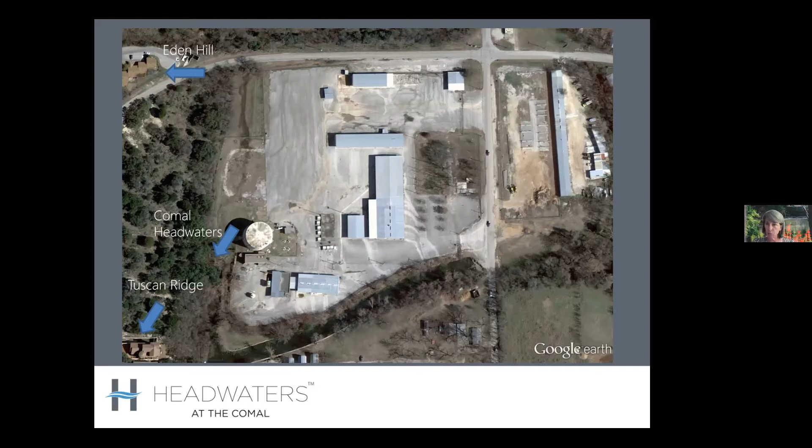They outgrew the site and moved up to the 306 site where they currently operate those same facilities and warehouse and electric and water operations. So the site sat vacant for a number of years. They moved out of the site in 2004, and a plan was created to repurpose this site in 2012 through 2014. And this is the vision for that site. So really completely changing this site and making it this environmental showcase. And we're going to talk a lot about that as we move through here.

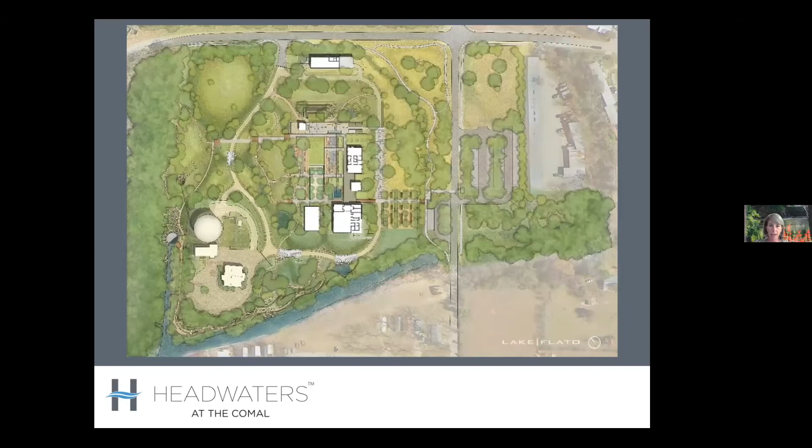So the Headwaters at the Comal nonprofit, as I said, started in 2017, and we got to work. We are working on programs and operations of this site as it evolves. We're a fundraising partner for New Braunfels Utilities to see that master plan come to fruition, as well as we've developed kind of 4 pillars of work that we really focus in on at the Headwaters. The first one is educate and demonstrate.

So this site is just rich for all kinds of educational experiences. Currently, we are offering watershed education programs, science, engineering, art, and math programs for younger kids. We've developed some restoration tours, native landscaping 101. We have field trips for 4th to 6th graders, and we're always continuing to develop more programs on this site. You can find out more about those on our website, and we invite you to come and join in one of those programs.

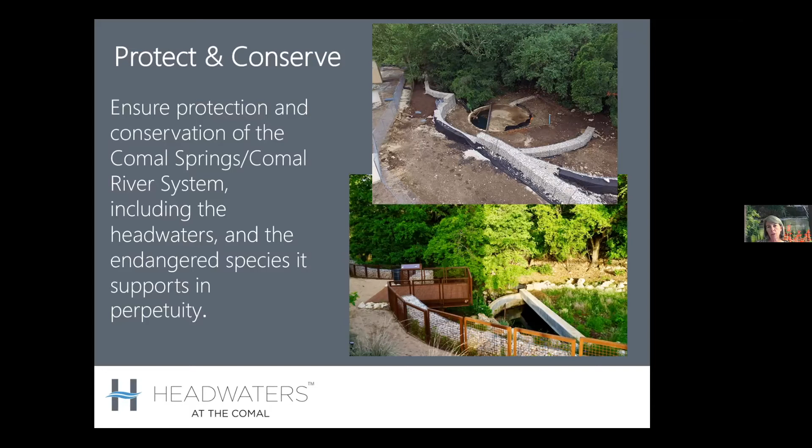You can see from these photos here, this is actually a shot of the Headwaters Springs up in the top left, just after the phase of restoration began. And then the picture on the bottom is what it looks like currently. So we really cleaned up the area around the springs. These rock walls, this curved wall and the ones along the bank here, are called gabion walls. They're helping to divert water away from that headwater spring and also slow it down and filter it before it reaches it.

And one more piece of the protection and conservation has been to partner with New Braunfels Utilities on the One Water work that they're doing. I just wanted to briefly mention this. I know there have been some talks. The Comal County Conservation Alliance had a great talk by Jennifer Walker recently on One Water. One Water is not a new term. It's a worldwide effort. Texas has recently really become a thought leader in One Water, and New Braunfels is looking to be its own leader in this effort, a regional leader.

And all One Water really means is to plan for and manage water resources more holistically and sustainably. Currently, water is really siloed in Texas. Somebody owns it, somebody manages it, somebody regulates it. An entity does wastewater, somebody else might do stormwater capture, somebody else delivers water to your home. So there's all these different aspects to it. How can we work together instead to manage that more holistically? It's also looking at protecting water resources in a way that maximizes environmental, social, and economic benefits. Of course, water is a celebrated feature here in New Braunfels.

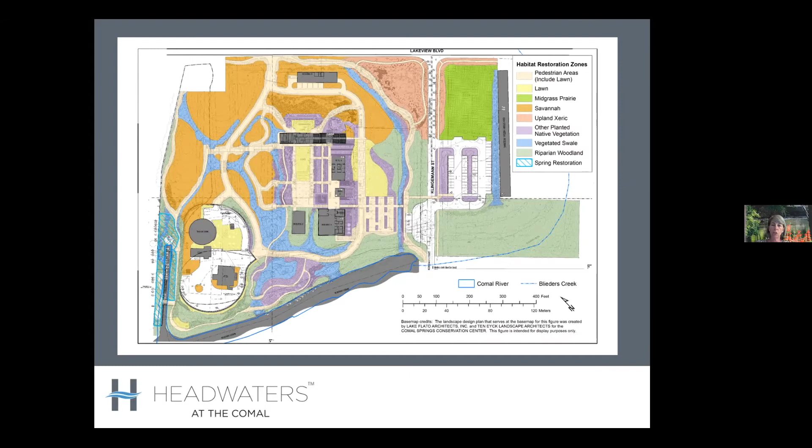And then within that, we'll have some demonstration gardens trying to show, well, you may not be able to plant a whole prairie ecosystem in your backyard. How can you incorporate little pieces of that to help protect and conserve our native creatures, birds, bees, butterflies, other pollinators, and incorporate small pieces of that in your yard. And so we'll focus a lot on that work.

And then, of course, the main goal of the first phase of the project was to reduce the pollutant load on the Comal Springs. So if you remember a few slides back, I showed the asphalt covered parking lot that we're at the very bottom of the Balcones escarpment in this watershed area. And so in a normal rainfall year, they could estimate that the water that would rush across that property completely unchecked and carrying with it animal waste, oils, debris from both the utility yard and upstream would have been around 11,850 pounds. That's equal to the weight of 2 Ford F-250s, right?

So that amount of pollutants would wash into the very beginning of the Comal River on a normal rainfall year. That's not during one of our big rain event years, which are becoming more frequent, but still a huge pollutant load on the river, at its very headwaters. And so the main goal of the project was to reduce that load. And post restoration, the improvements should get that down to less than 1,000 pounds. So it's like a 90% improvement to the pollutants that wind up in the Comal River.

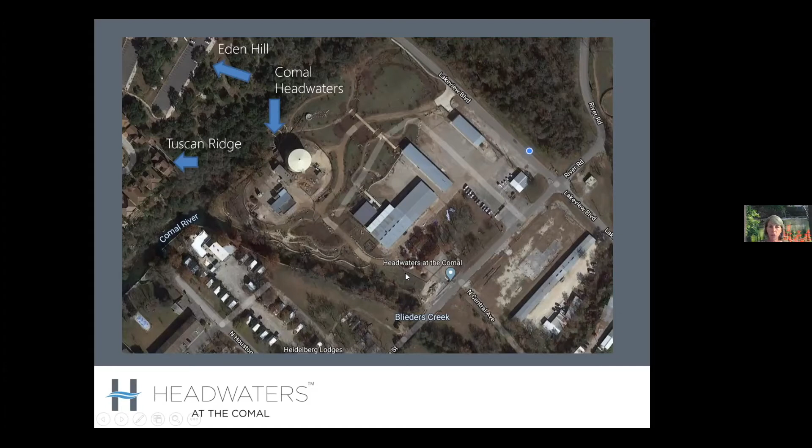And we're going to do that through a number of different measures that then we can monitor and share with the community. So this picture, if you look closely, the colors aren't very vibrant, but this top part here, you can see the greenery in here now. There's some trails and removal of asphalt in this whole area. That's kind of an overhead view and the beginning of our work here to remove those pollutants from that Comal headwaters spot. And so we started that with BMPs, or best management practices, and an actual treatment train.

So water now flows across this property, and here we're up at the top of, can you all see my clicker or my cursor when it's moving very much at all? I don't know. I'll just keep talking and hope that people can see it.

So this is up at Lakeview Boulevard again. And so this would have been all unimproved area. And now the water comes flowing across this property and lands here first in this little vernal pool, a little biodetention pond. It runs through swales, bioswales, and a little channel that then takes it to this larger one in the middle, another biodetention pond, an opportunity for that water to soak in and be treated through the native grasses and plants. And finally, there's another constructed wetland here at the end, which will do a final treatment on that water.

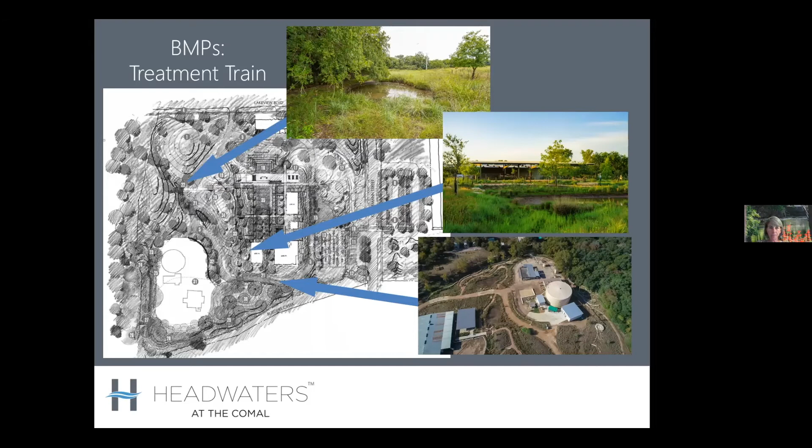Whoops, my slides keep popping up on me.

And the features that I mentioned before, the first little vernal pool is back here and the edge here, and then the water will flow through this swale that runs along here and will wind up at that other big pool. So, a beautiful way to stop, to channel stormwater.

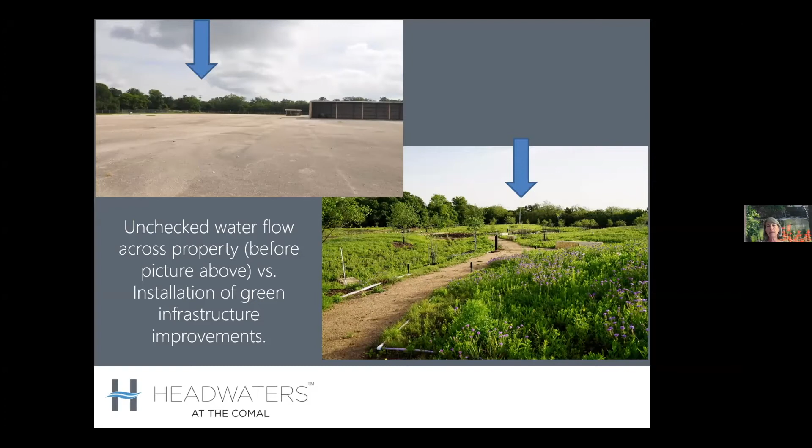First of all, we're not having to use a concrete sluice of some kind, but we're installing this beautiful green prairie, providing a number of different purposes that ultimately help to keep water on site, give it to wildlife, polish it and cleanse it before it ever gets back to our Comal Springs.

Another view from another angle, and this is kind of one more step in the process, showing again this bioswale up at the top when it had just been installed, and then the lower picture a few years later. These bioswales can actually remove like 200 pounds of TSS, which are total suspended solids or pollutants, and they reduce the runoff by 1/3 of an acre foot.

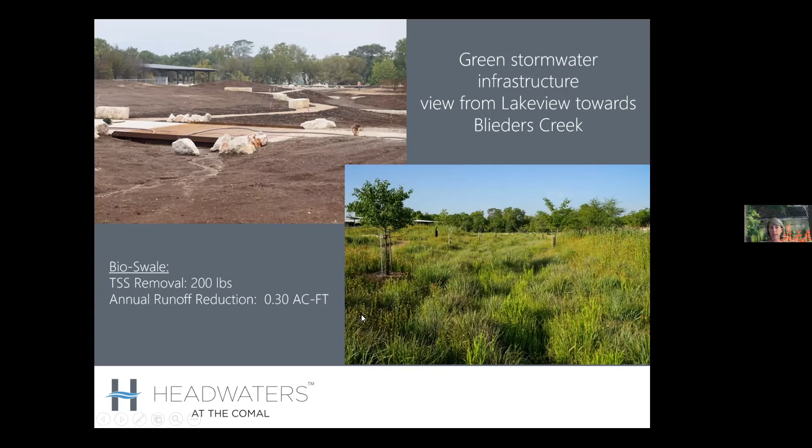Here's that spring cap again, just a horrible picture on the top of, obviously this one was a little bit impacted because of the construction on site, and we were just at the beginning of the project when we got this big rainstorm. But just this unimproved area, that is really what the Comal Springs, the water that's in that spring, in that cistern area, looked like before this project started. When you get a big rainfall, it was just gray and dirty and awful.

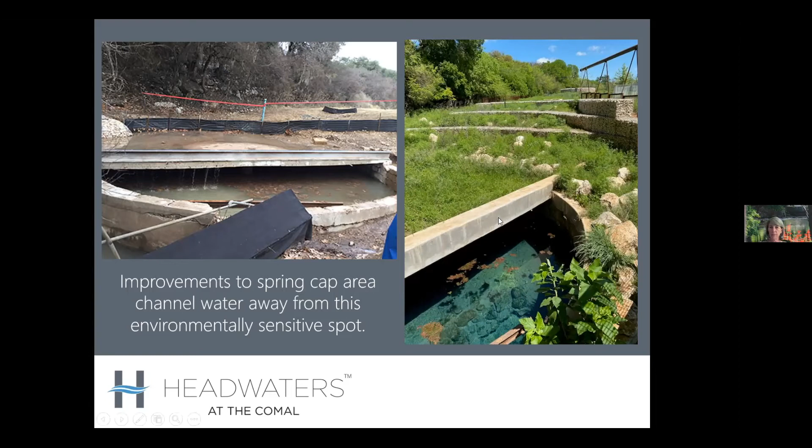And the bottom picture is what it more often looks like now. It's just crystal clear, beautiful, clean water. And you can see some of the upstream improvements there looking up towards Lakeview from that picture. Again, just some of the less improved area here.

The other feature that this is showing here is this diverter pipe up in the top. And that's a feature that's not going to be relevant to many other installations, but specifically at the Headwaters here, this is connected to a water treatment tank. And so this water that's on the site is treated potable drinking water that goes out to the community of New Braunfels.

And before the project started, if there were any problems with that treated water tank, it used to flush down this area here where that gravel is, and just right across this concrete into the spring run. And that water is treated with chlorine and fluoride, so a terrible impediment to the Comal Springs.

And now instead this water is distributed out through this diverter pipe into a catch basin, which again puts it into that swale system and series of vernal pools and bioretention ponds and constructed wetlands that help to channel and filter that water before it gets back to the springs.

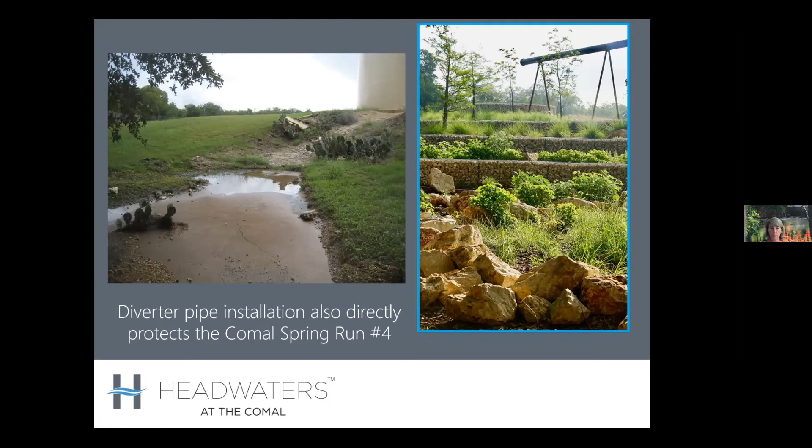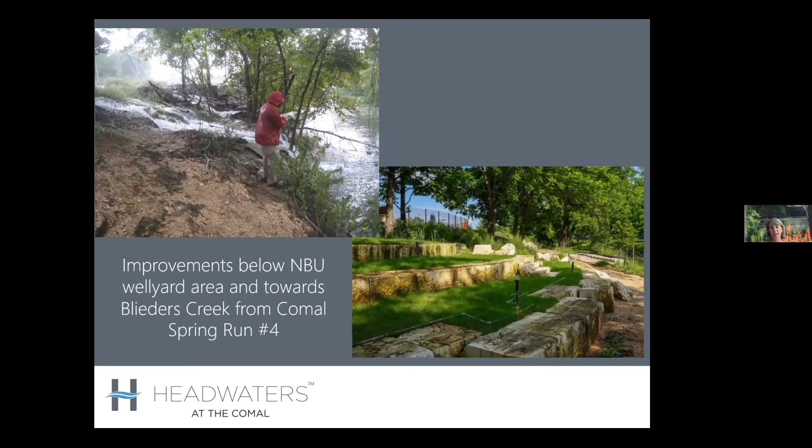Another picture just kind of demonstrating again the power of that water and the way it used to rush across unchecked. This area now looks like the picture at the bottom, and from another view. So that was basically phase one. Phase one was really that initial stage in green stormwater infrastructure, bioswales, bioretention ponds, and constructed wetlands that help to channel and filter that water away from the very beginning of the Comal Springs.

And as far as water conservation goes, we will also be starting another phase of a more technical aspect of using water on the site, and that's on-site water reuse. So we'll have a number of large rainwater harvesting catchment containers at the very front of this Center at the Headwaters. They will be capturing all the water from this roof off the main building. It's about a 19,000 gallon storage.

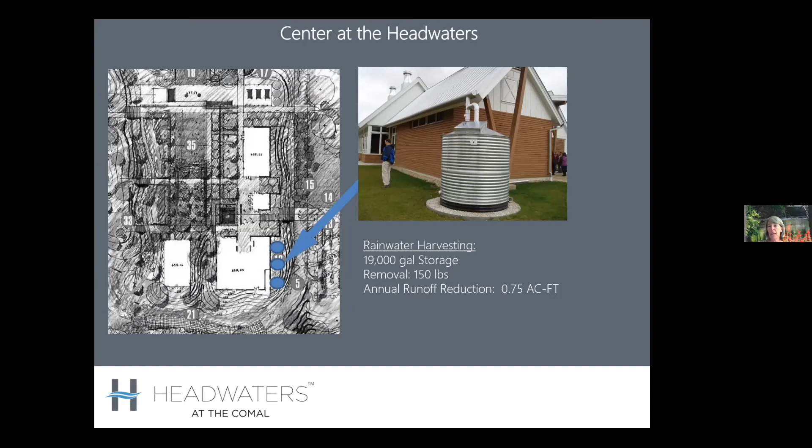It will, and we can testify to this from phase one, capture a lot of the water that was running off and potentially in previous years had been impacting the springs, but we'll also be able to start to use that as on-site reuse. So we'll use that for a number of different purposes.

A really exciting one that won't be completed till the final phase, but this is the first step of it, is this kind of on-site reuse system that is part of the main building, and also our building up here, which will be our environmental education center. So we have the rainwater capture on the front, and then the restroom facilities in the main part of the building are connected to a black water reuse system.

So our toilets will flush, channel into a sand filtration system, then be diverted to these subsurface wetland cells, mixing with rainwater collection. Some of it will be used for irrigation on site. Some of it will be pumped back to reflush those toilets.

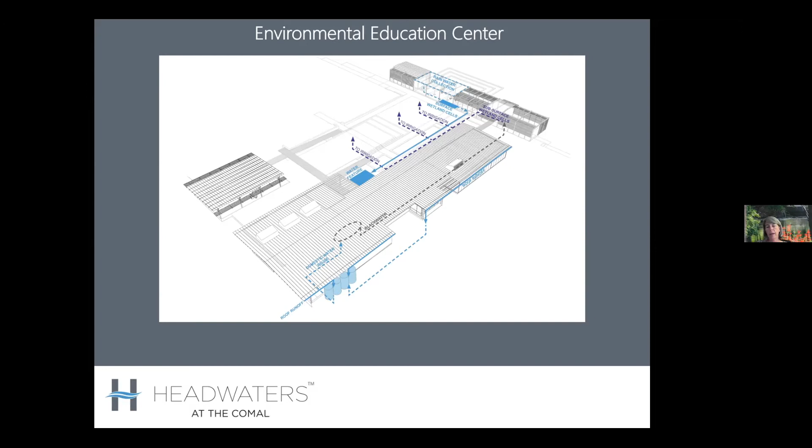So really trying to capture and preserve stormwater that's coming off the building in another way here by connecting it to this on-site reuse system, really reducing the water use from irrigation, which is one of the largest uses of potable water currently in the community. And so how can we start to demonstrate other ways of irrigating our lawns? Rainwater is a great option for that.

And so as rain hits our karst rock formations here in South Central Texas, that water just filters right through it, comes through these rain chains into these constructed wetland cells, and then is part of this larger story about how our water bubbles up through our springs here in Texas. Another fun fact about the Comal Springs: it provides some of the largest freshwater flows to the Gulf of Mexico, lower than the Canyon Lake Dam here.

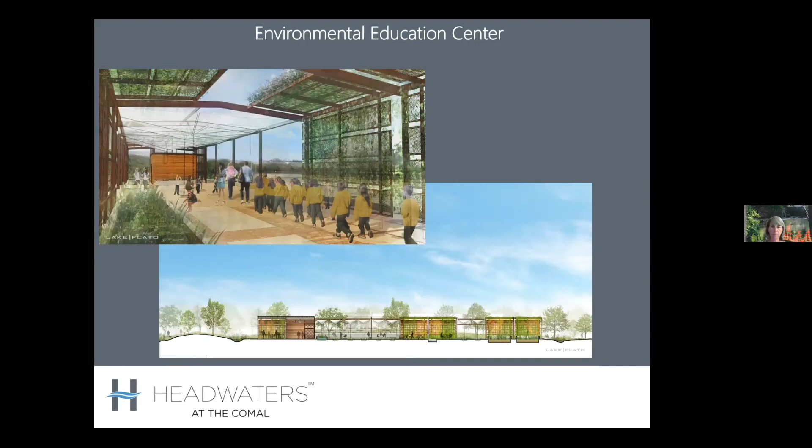So we will actually have some troughs and channels that run through the site and wind up in a pool that represents the Gulf of Mexico. So one, educating and demonstrating these new technologies, black water, on-site reuse with our rainwater harvest catchment, but also visualizing for people how this water system here in Texas is so important all the way to the Gulf of Mexico and for the health of our bays and estuaries.

So after we finish the center at the Headwaters, we'll be moving on to the parking area across the street. And that's another great opportunity for removing some real hard packed surface. There's not much asphalt over there, but it is hard packed impervious cover. It has not been maintained. It's used right now as a staging area for some of the construction that's going on in the community.

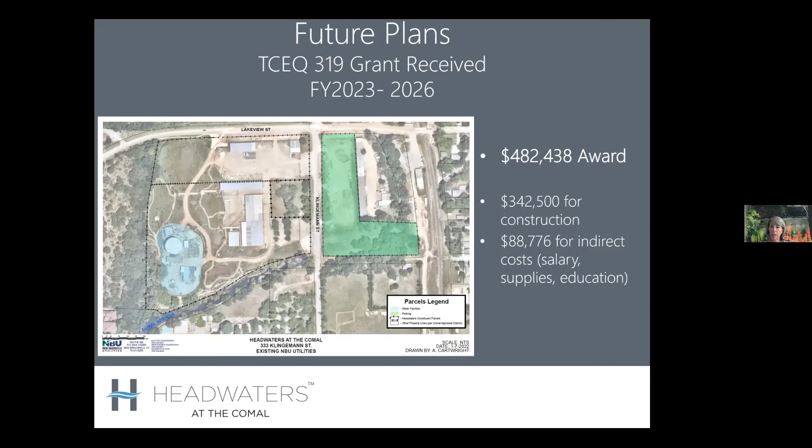We've received a grant from TCEQ, which will start next year, to help us repurpose that site as well. And it will become another great demonstration area for parking areas in the community. So showing here are some curbside rain gardens. So instead of just having stormwater from a parking area rush off, it instead flows into center channel planting areas that don't need additional irrigation, but instead capture and hold that water with the right plantings in there.

Those plants survive and thrive and provide a space for that runoff water instead of just sitting in a parking area, to be collected and channeled if necessary through a bioswale to get back to the water. We can also demonstrate some different types of permeable parking features. This one shows a green parking area. There are other surfaces that are more permeable than asphalt or concrete. So we may demonstrate one or two different options here.

Those all will help again with that runoff to Blieders Creek, which is actually where this parking area flows, but that eventually gets to the Comal River. So again, it's important in protecting and conserving and making sure that the water that does get to the Comal is as clean as possible.

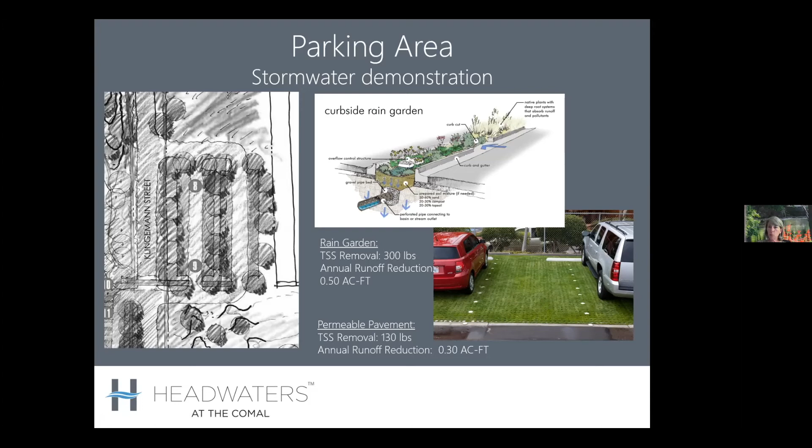So, kind of a side note to the work that we've been doing, we were recently introduced to a team called Ecometrics. They were created because of Hurricane Katrina, actually, and a family that wanted to show the value of keeping our wetlands, our forests, the areas upstream and along the coast of Louisiana, and how important they were for the economic benefits of the community.

And so Ecometrics has really worked hard to put a financial value on some of the more esoteric things that we're doing in these kinds of green projects. So how do we value the social return on investment of a project like the Headwaters? How do we really show the environmental benefits of what we're doing at the Headwaters?

We took the Headwaters project to the New Braunfels Economic Development Corporation recently, and they asked what the impact of our project was going to be. And that's how we were connected to Ecometrics. You can see some of the work they've done has been for companies like Citgo, Dow and Shell Oil, to help them contribute more to these environmental projects by showing the return on their investment.